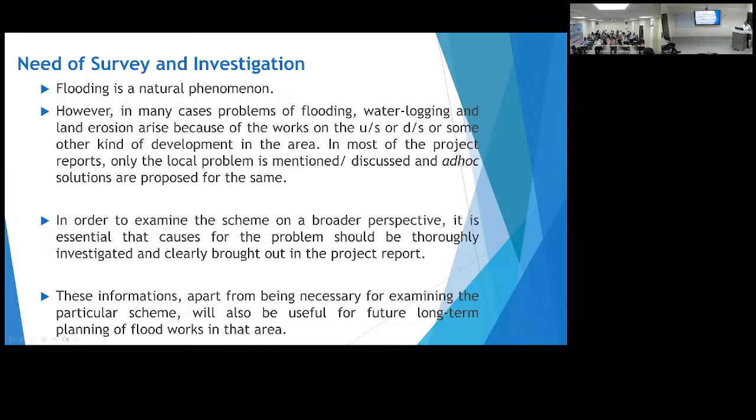So the first, the survey and investigation, is the first and most critical step for the planning, design and execution of any project. Under this, you assess the flood hazard, you understand the hydrology and hydraulics of the area, and it gives you the environmental and social impact: what social and environmental impact is going to be there after your works.

And even during this investigation you will come to know, if you are not taking up the project, what may be happening, like negative impacts you can say. So this work will support the further design or planning of the project. What work is to be taken up will be decided by your study under survey and investigation.

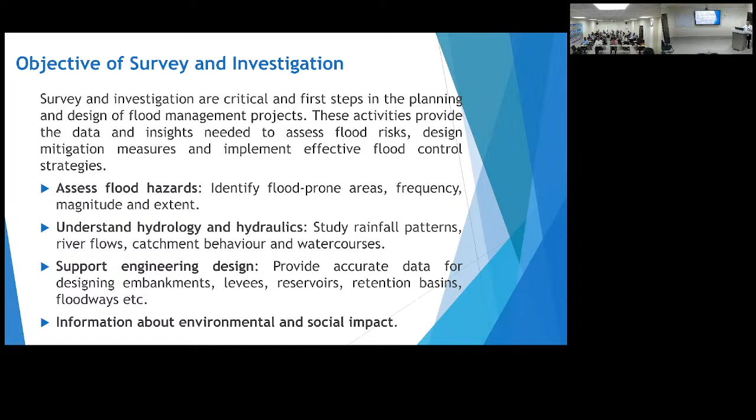Under the investigation activities, you will be collecting the historical data, like the flood history, maximum flood levels, flood frequency analysis. Actually, this survey and investigation data you are going to use for the design and finalization of the type of structure you need to introduce in that particular area.

If I say, like in anti-erosion, there are a number of structures you can place there, but what type of structure will be suitable in that area will be decided only after the proper survey and investigation. So under this you will be collecting the climatic data. During design, you will have flood modeling. For the input data of flood modeling, you need to have survey and investigation.

So, the objective of survey and investigation is to optimize your resources. Resources like money and time. These two are the most important resources. Sometimes in flood cases, you have money but you don't have time, because you have to complete before the next flood. And sometimes you have time, like in case of embankment, but you may have a problem of money. So optimization is very important, and survey and investigation will help you to optimize all these things.

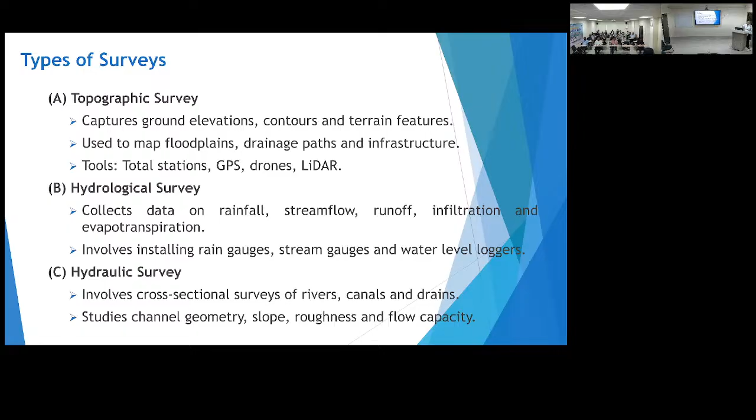In land use and socio-economic survey, actually the least importance is given to this. In most surveys related to flood, this is ignored. But for the planning and design of the structure, this is very important, because the land use and land cover of the basin decides the silt content of your stream. I'll come to this later.

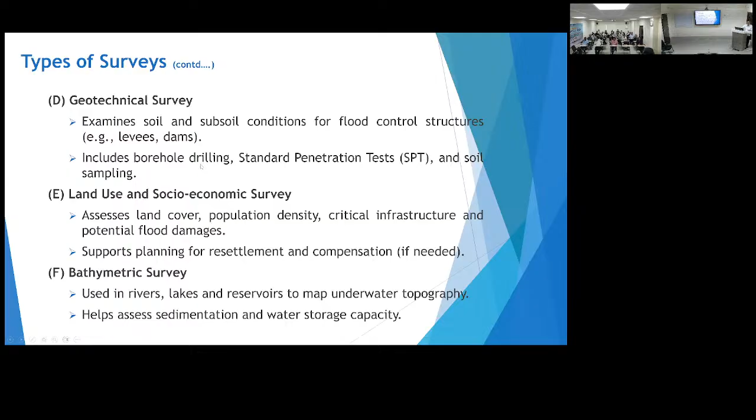Now if we discuss in detail, under topographic survey you prepare an index map. The index map may be of different scales. On a smaller scale, like 1:2 lakh, you indicate the location of your work, and a detailed index map may also be prepared on a larger scale, like 1:5,000 or 50,000. In this you can give the control points, meaning which stretches are going to affect your work or your design.

So under the topographic survey, you need to put the maximum details on the map, and after that, most importantly, you have to prepare a contour map. This may be done on 1:15,000 scale, or you can prepare plane tables also, if the project area is not big, or for anti-erosion works.

So the detailed contour map should have the maximum details required for planning and design, because on the basis of this topographic survey you finalize the alignment of your embankment, where the drains are passing the embankment, where the bridges are, or if any road or bridge is going to cross your embankment. All these should come in your contour map.

The contour map will show the natural slope of the terrain. On the basis of that, the location of regulators may be decided. Otherwise, it will cause flooding on the countryside. So all these details should be covered in the topographic survey.

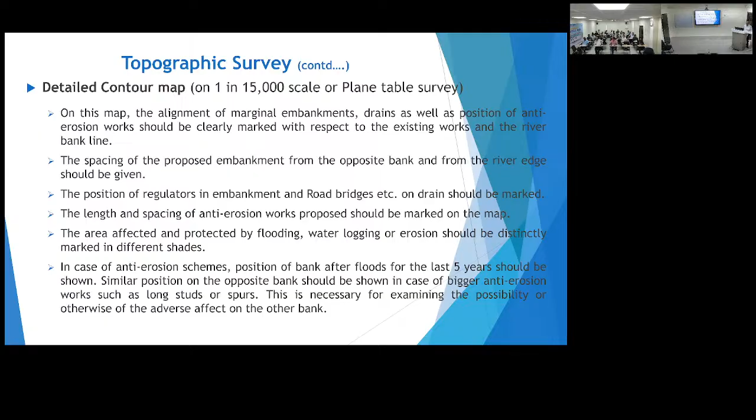After that, it comes hydrological survey. In hydrological survey, you need to show the river behavior, what is the nature of soil in the river bed, and for the holistic assessment of the situation, you must have qualitative and quantitative analysis of the silt of the river at the proposed site.

Qualitative means what and why. If something is there, why it is there, what is the composition, and what is the detail. And quantitative means how much and how often. How much silt is coming to that area, what is their behavior, whether on your bank it is aggradation or degradation. So it should be studied in a holistic manner.

The maximum velocity that has been observed, if there is a nearby site of CWC or any other department, you can take data from there, or alternatively you can take the slope and cross section, and that may be calculated also. I think all these things will be covered in your design part.

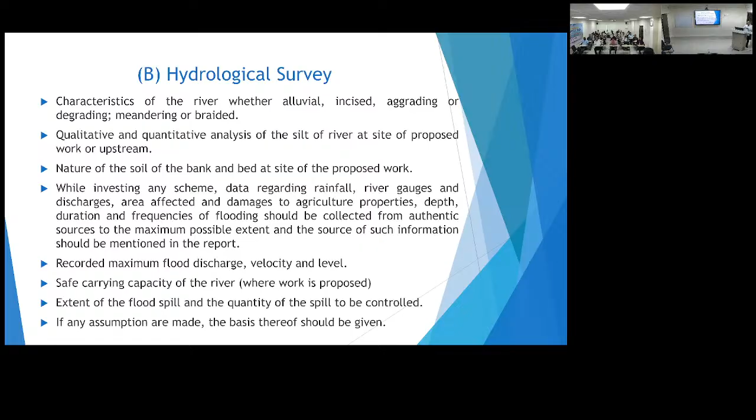Now in hydraulic survey, for embankments, first we come to embankment. It has long embankments like 50 kilometer, 60 kilometer, 100 kilometer. So longitudinal section is very important, because along the length of the river, it will not be a plain thing, it will be undulated, but the top level of the embankment will be as per the slope of the river. So your top level will be gradually going down in the downstream direction, but the ground level will be undulated.

Therefore, for the calculation of the quantity and then cost of the project, in embankment, earthwork is the most important factor. So the accuracy of calculation of cost and quantity depends on your longitudinal survey.

Sometimes you take the cross section at long distances; you prepare a cross section with top level, HFL and ground level. So the calculation of quantity will depend upon the number of cross sections you have taken along the whole length of the embankment. So preferably,

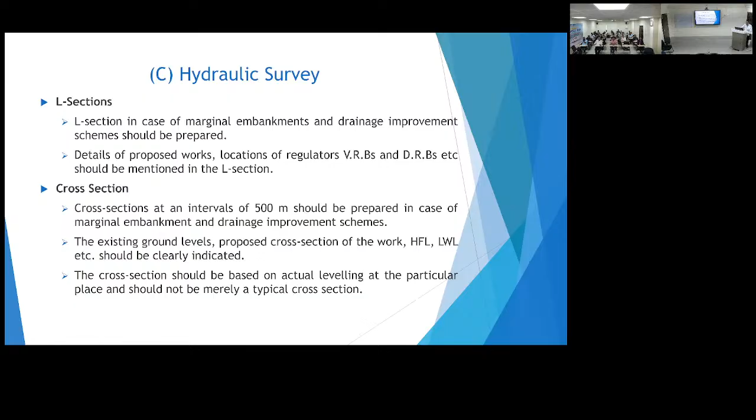So it is always advisable to have a proper longitudinal section, and that should be utilized in the calculation of the earthwork quantity and further cost of the project. And details like proposed locations of regulators, bridges, drains crossing the embankment, all these things should be mentioned or indicated in your hydraulic survey.

In geotechnical survey and investigation, as I just told you, the most important thing is the earthwork for the construction of the embankment, and it would require a huge amount of material. So it would be always cost effective if you are utilizing the local soil, because if you are carrying it from a far distance, definitely it is going to have a huge transportation cost. If you see, the IS code also says you can use local soil for the embankment and you can cover 0.6 meter with good soil.

The purpose is, if you are making an outer layer of good soil, which has a greater clay content, it will resist against erosion and it will encourage the growth of grass and all. So obtaining the local earth also, like from the bed of the river, should be carried out in an engineering way, not that you picked it up from anywhere and just poured it along the length. So for the borrow pit, we should have a proper marking of the borrow pit on your map along the length of the embankment.

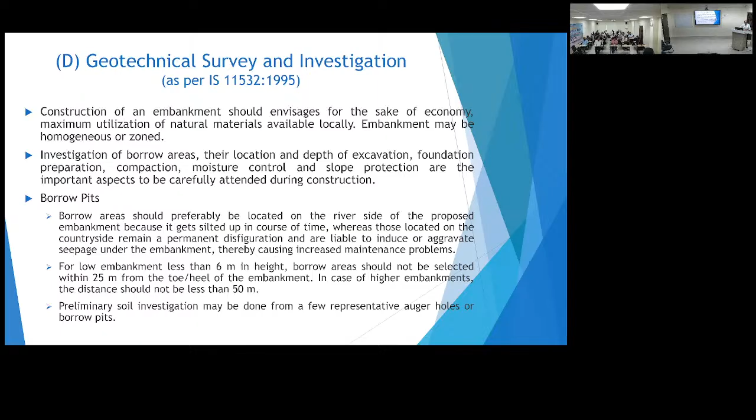So once you have located some area for a borrow pit for material, you may take up some preliminary investigation of the soil. Once the soil is clear from your initial investigation, then you can go for further detail of its engineering properties, whether it will be suitable for the construction or not. So after selection of an area and preliminary investigation, detailed investigation should be undertaken. In this, mainly engineering properties should be determined in the lab.

And for very important structures or structures higher than 6 meters, more parameters should be tested, like permeability, plastic limit, shear strength, dry density, and compaction, a very important parameter, the compaction test. So all these should be tested in detail, because if it is not up to the mark, it should be rejected.

So in the borrow area, there should be plans showing borrow areas and quantity of material for different zones of the embankment section, prepared during investigation for actual construction. Because if there is any change in this aspect, like if at the time of construction sufficient quantity is not available, you will have to borrow it from a further distance. It means your transportation cost is going to be more.

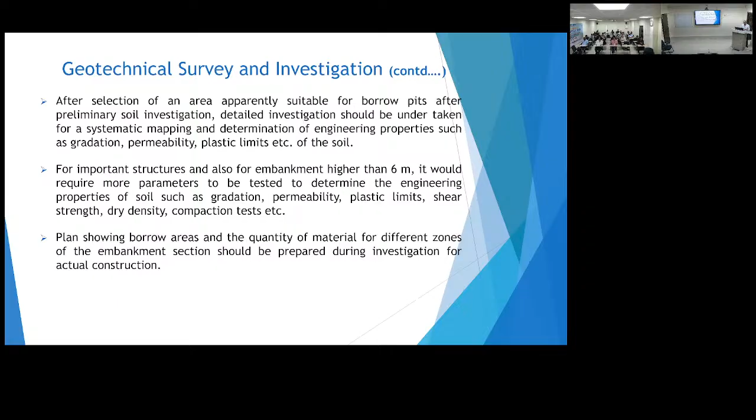You can think, what is the use of planning a borrow pit? We can take out any quantity of material. No. You will only be considering the quantity which is qualifying your properties. Only that should be selected, and only that quantity should be taken in your DPR. Second, you also have a limitation on depth. Even if you have qualified soil meeting your requirement, there is a limitation on quantity, because you cannot excavate deeper than mentioned in the IS code.

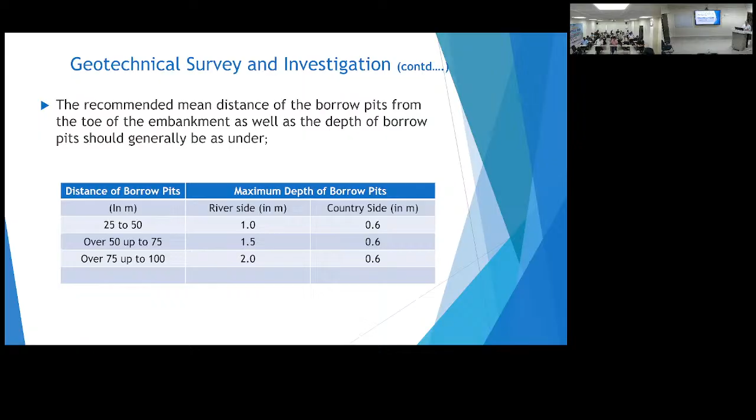So second, you can say as the distance of the borrow pit is increasing, the depth allowed for the borrow pit is also increasing. It is for the very same reason, that the stability of the slope should not be in danger.

Now we come to land use and socio-economic surveys. As I told you in the initial introduction, land use and socio-economic surveys are given the least importance. But actually, land use and socio-economic surveys give you the actual picture of the problem. Socio-economic survey means what is the population being affected due to flood, what is their density, what is the other infrastructure in that area.

When you decide the alignment of an embankment, you know, rivers do meandering. So due to meandering, you cannot keep the embankment straight. And second, some villages will be very close to your river, and some may be at a sufficient distance. And every villager would like you to construct the embankment in such a way that their village is safe.

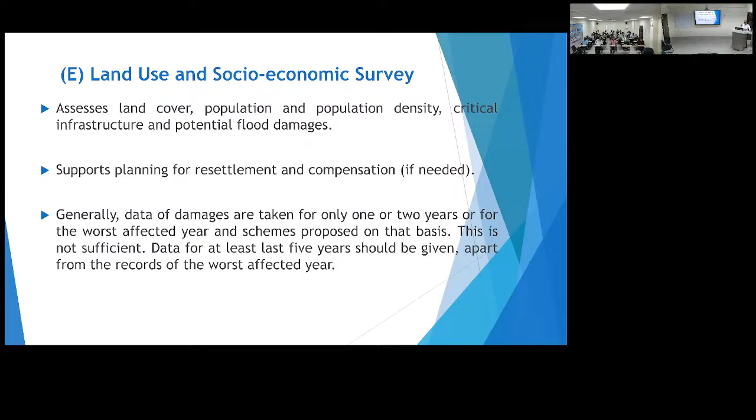So, in the socio-economic survey, you have to give all these points, whether there is a railway line, hospital, or school, or population, or something critical, like religious places, a very old temple and all. So all these should come in your report.

Now, what is the time for the break? I suppose I'm within time only. Sorry, 3:30. Okay. I don't want to miss your tea break. So okay, we'll break here, and after that we have very few slides left. So we'll continue after the tea break. In the meantime, if you have anything to ask, or at the end only. Sorry, I couldn't.

No, there are so many things being used, like lidar survey, even drones are also being used, and there are so many. It depends on time and cost. Yes, so you can use it.